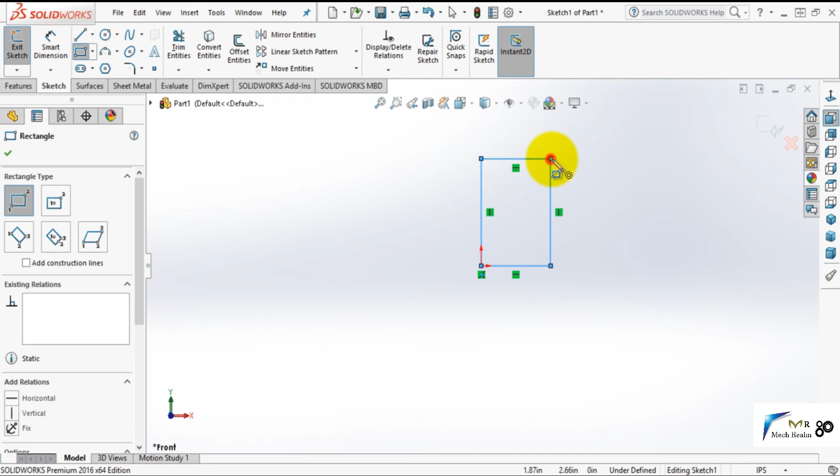Let us select a front plane. Now select a rectangle. Select dimensions in mmgs, that is millimeter gram second. Now define the dimensions as 1000 and 250 mm.

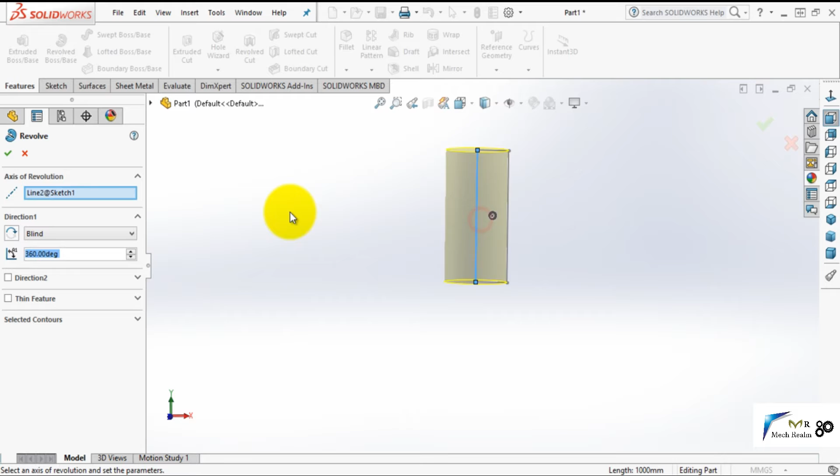Now let us rotate it, I mean revolve it using the center line. Once again we have to select a front plane, normal to it, select a center line from this point to this point.

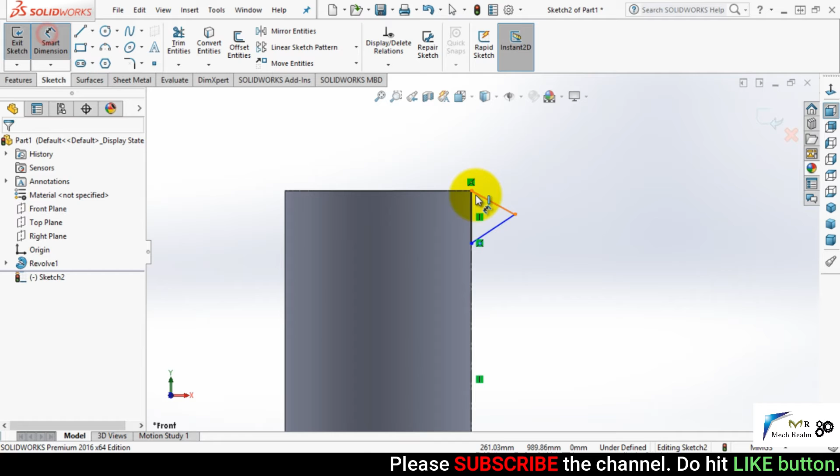Make it vertical. Now let us take a line and create a triangle somewhat like this, defining it as 10 degree from the top plane, and the angle between these two lines as 20 degree. One more, this one has 10 degrees.

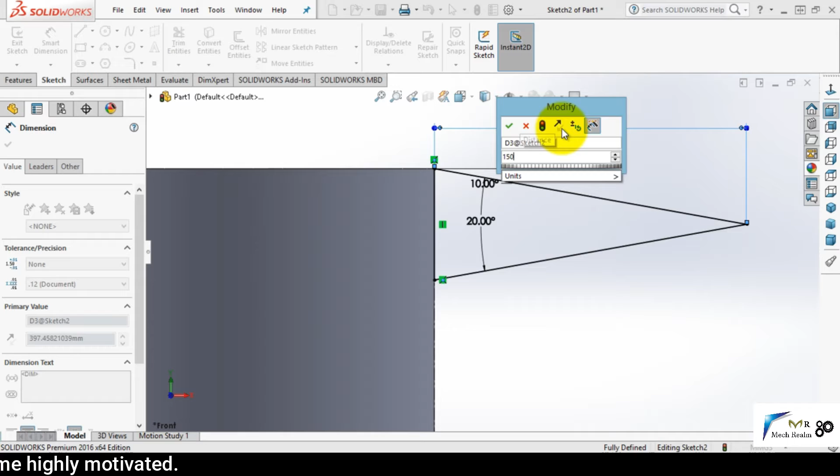Now let us define the distance between these 2 points as 150 mm. Exit it. Now using reference geometry axis option, select the cylinder and click OK. An axis has been created. Once again take revolve command, select a sketch, a center line, click OK, and our shape has been created.

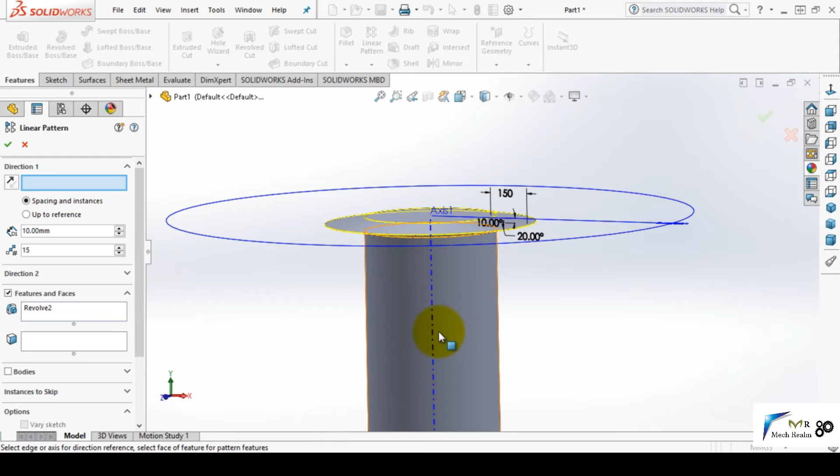Now in order to pattern it, we have to select linear pattern, define direction as this one. We can flip upwards or downwards from this icon. Let me define the distance as 70 mm and the number of items as 15. Click OK. Let me convert this circle and extrude it up to a height of 200 mm.

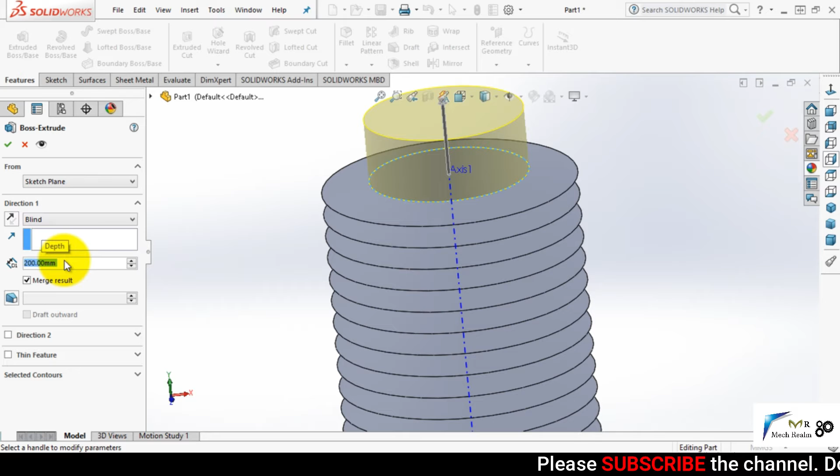Once again we have to take a front plane, this one, select a center line from this point in this direction, extend it.

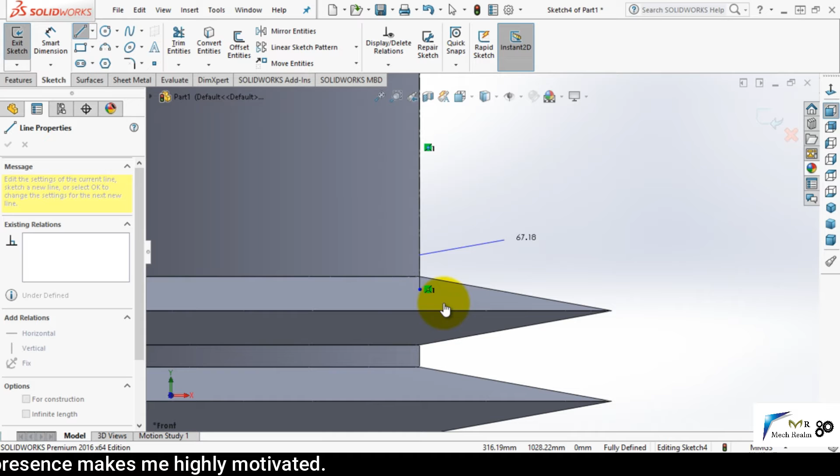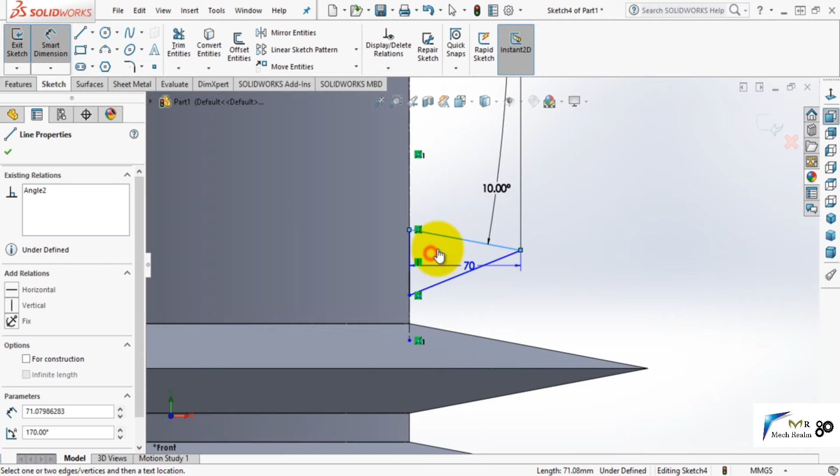Once again take a line command and create a shape like this one. Define the angle as 10 degree once again and the distance as 70 mm. In order to close it, create a line and the angle between these two as 20 degrees once again. Now its position from the top face may be 160 mm.

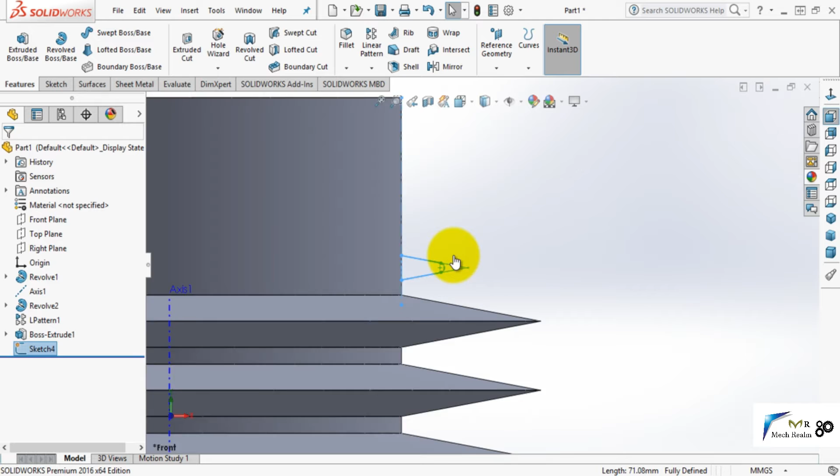And let us take fillet and define the radius as 5. Let us guess, yeah, 5 will work. So let us revolve it from the center line and the shape has been created.

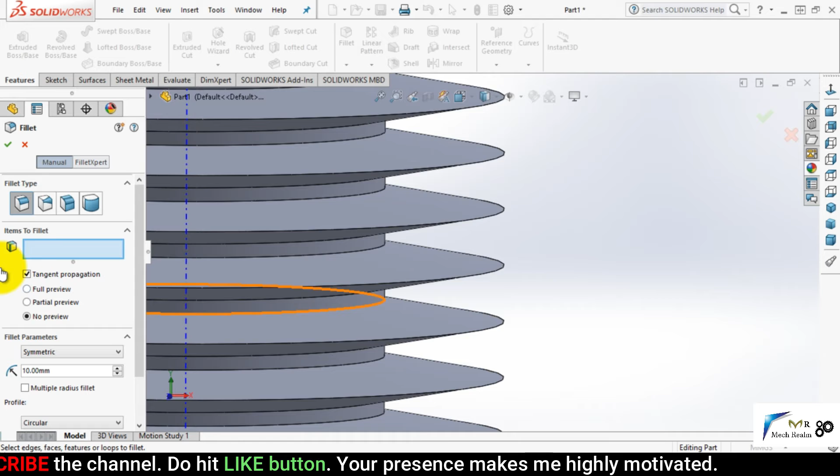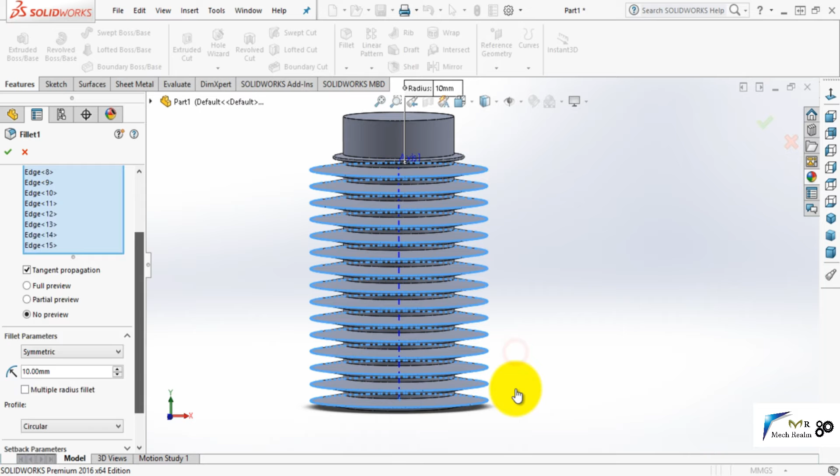Once again we have to select a fillet command and select these edges. We have to select an edge, not a face. Let me select it once again. Click OK, and let us reduce the fillet radius to 5 mm and click OK.

Yeah, this one looks good. Now let us select this face, sketch, and convert this circle.

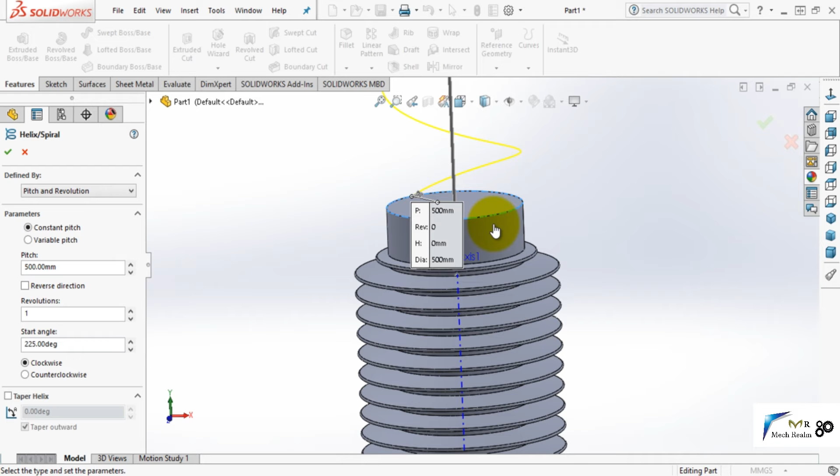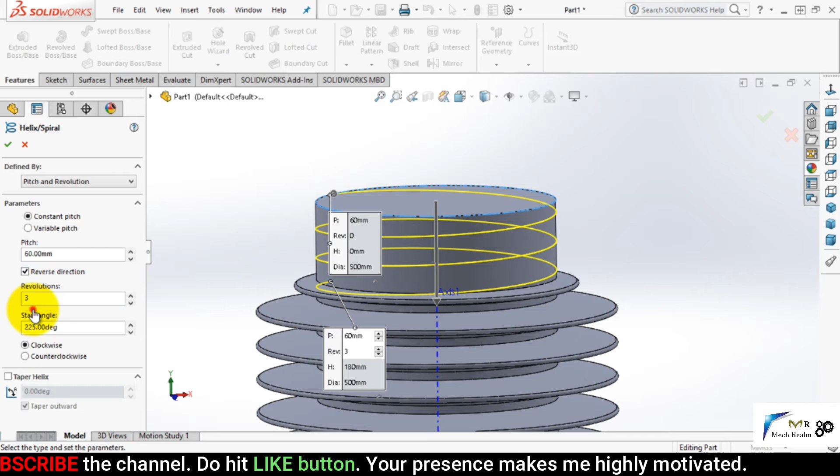Now using curves, helix and spiral, flipping the direction, let me flip it where it is, this one, reverse, and define the revolution as 3 revolutions in the model which I have, and define its pitch as 10. Let us guess 10 is very less, so let me take it as 50 or 55. Yeah, no, let us take it as 60 mm. This one is good.

Now we have to select this point and click OK. Now normal it and let us create a thread.

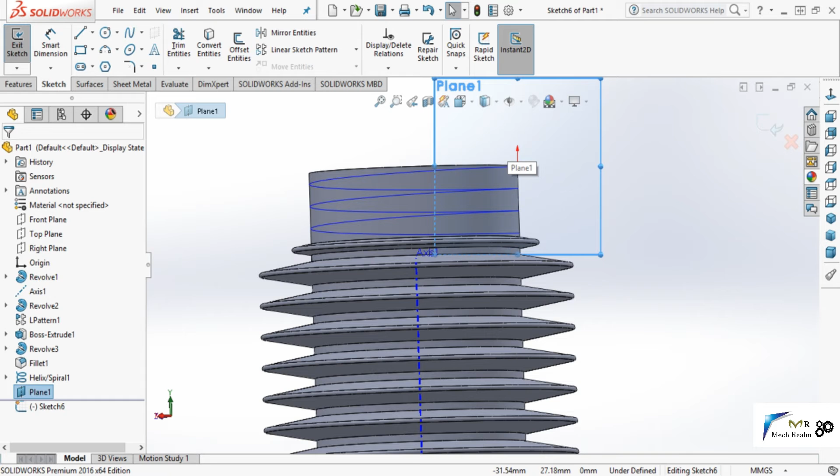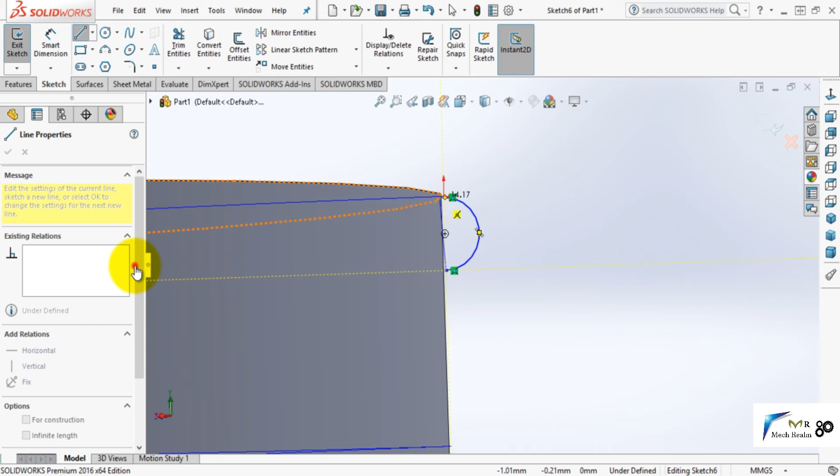So for creating a thread, let me create a circle, or we can say simply a 3-point arc from this point to this point and like this. Once again we'll have to close it, so let me close it, and these 2 points let us coincide it.

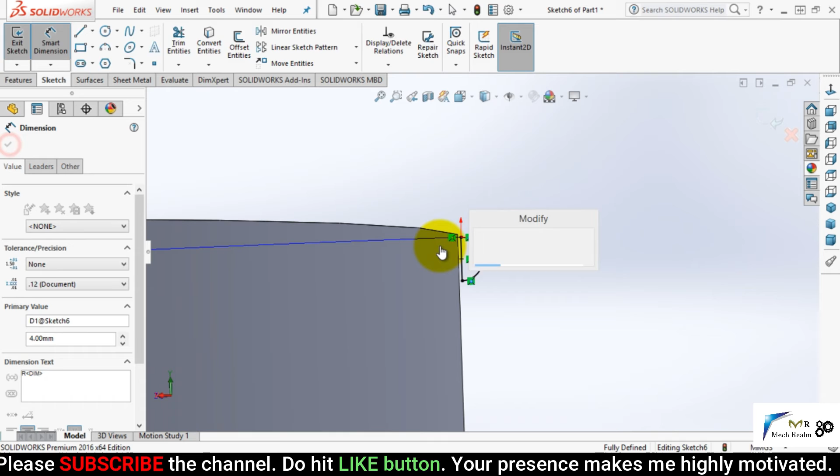And let me define the radius as 4 mm. So 4 mm is quite less, so let me give it as 8 mm. Now let me see, so now we have to select swept boss, select cross section, and the path, sweep path. Our shape has been created.

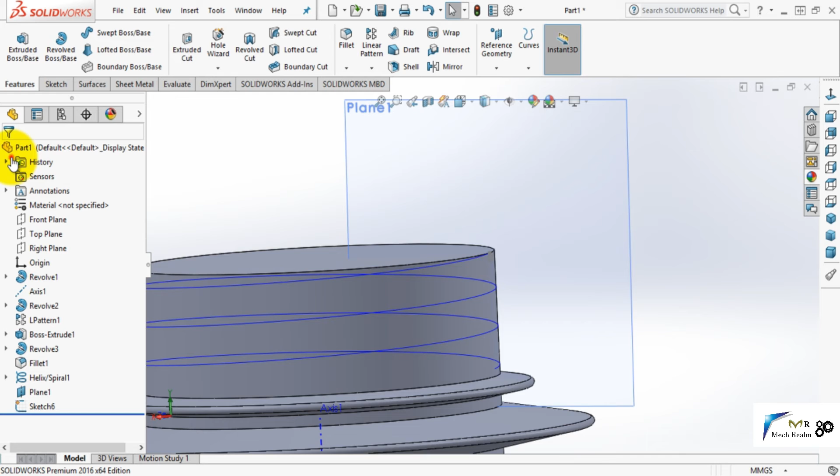Unable to create this feature because it would result in zero thickness geometry. Okay, let me reduce the radius as 5 mm, and now let me try the swept cross section path. Clear? So now it has been created.

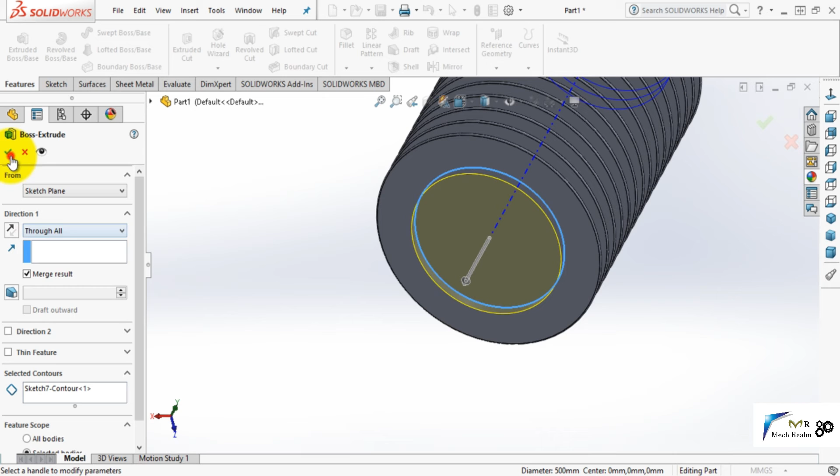Let me hide this plane. So this is our geometry.

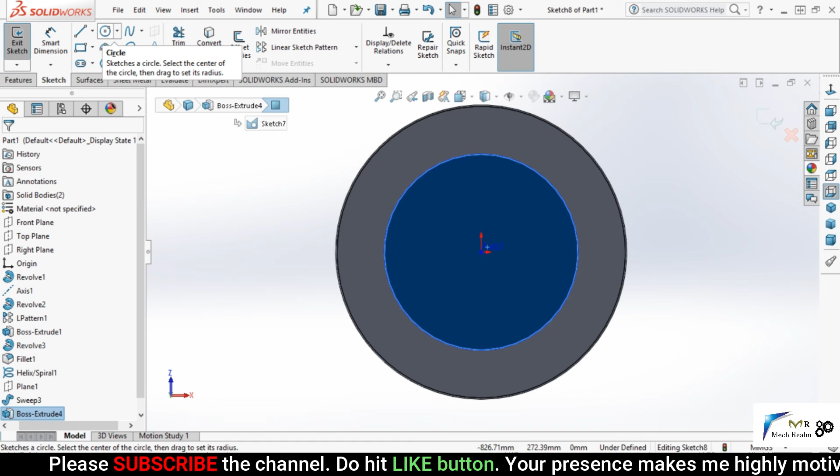Now once again we have to select a front plane, or instead of choosing a front plane, let me select this one and normal, and let me create a circle small enough to provide a diameter of 200 mm. Or simply we can take 250, exit it, and extrude it up to some measurement of 200.

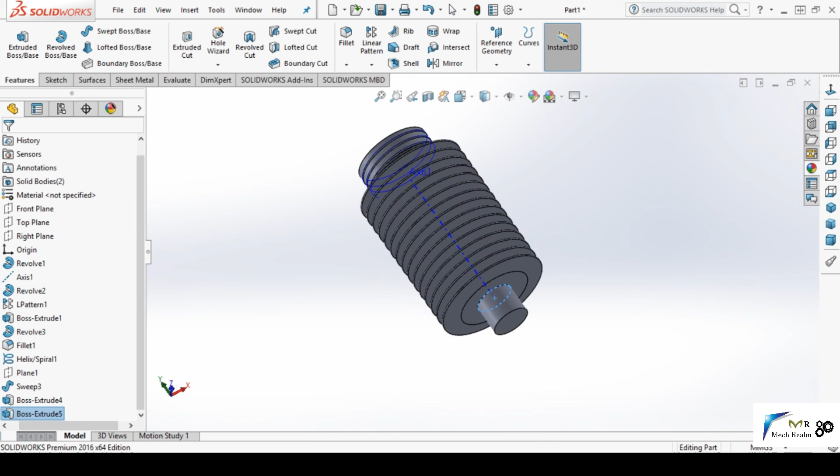200 is quite good, not so bad. So this is our shape. Now let me take a front plane.

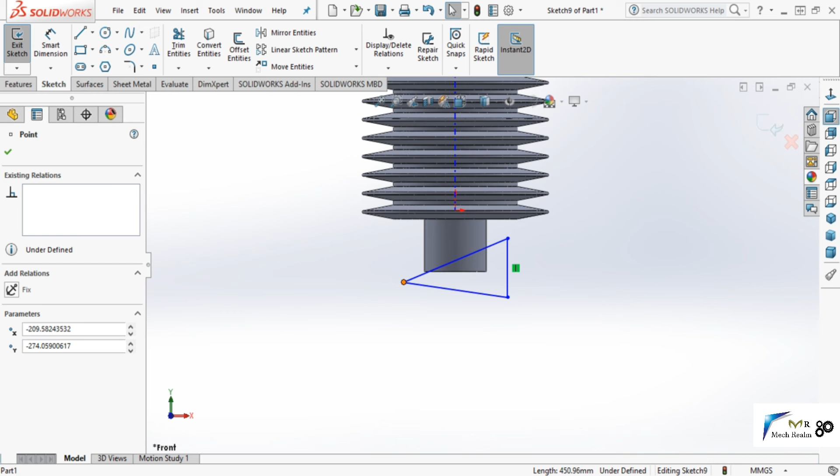Let us take a line command and create a cutout like this. Exit it and click on extruded cut, mirrored, click OK, and our shape is like this one.

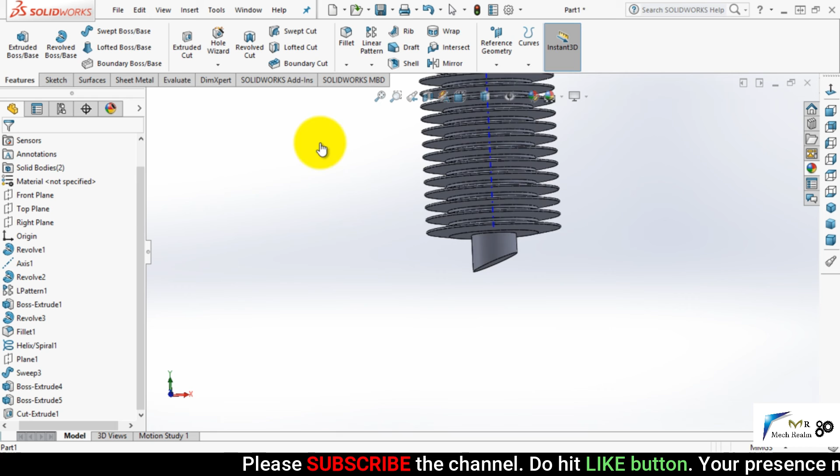Now we have to take a shell command. Where it is, shell, click here and define it as 10 mm. Click minimum radius of curvature, so let me take it as 5. Click OK.

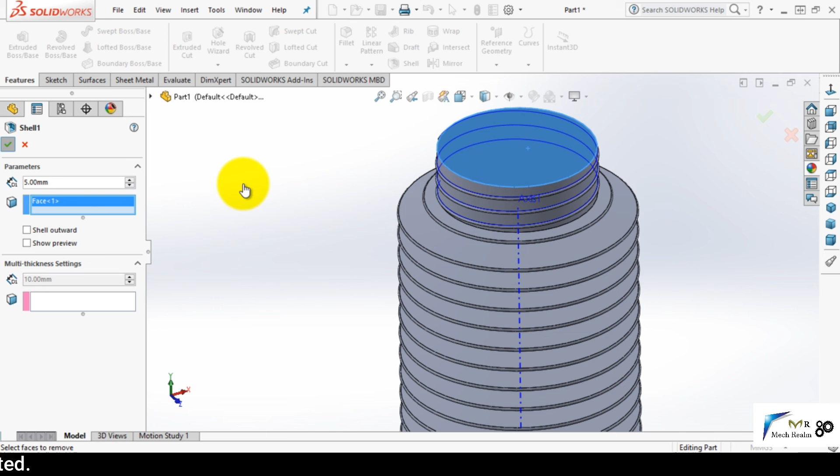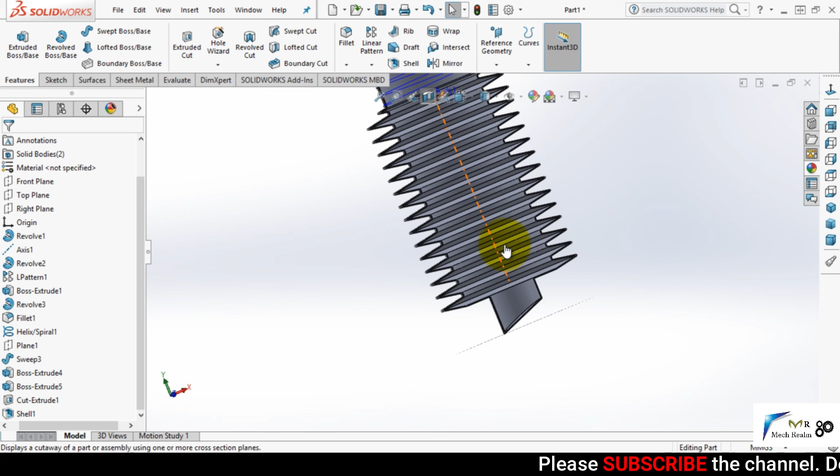Now let me take a cross section and show you what it is. Now unselect the cross section, that is a section view. Or this shape has been created.